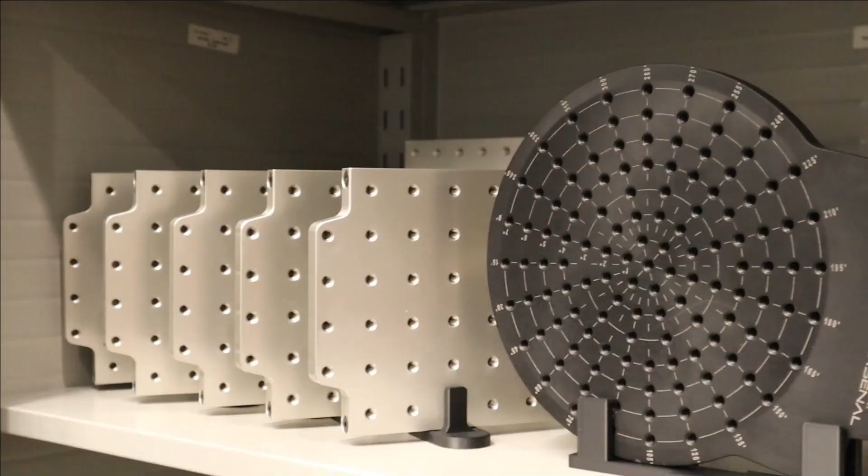One thing I do want to get right out in the open is that while the inspection clamps and fixtures don't really wear out, this is actually the most consumable fixturing system on the market for the inspection lab today. So many customers will be reordering and placing additional orders for ancillary products and additional accessories, more plates as their production grows. And as they're building fixtures for repeat jobs, those fixtures are going to sit on the shelf and they're going to need more fixturing for more jobs in the future.

So regardless of whether they are inspecting onesie-twosies or prototypes or long runs of production and repeat work, going with a modular design and getting parts on and off their machines faster is going to be the utmost value to them. Because profits are in the speed of the swap. We know that on the CNC machines on the shop floor - if you can get product in and out of that machine faster and eliminate that downtime, that's where you're going to start to see your bottom line grow.

No matter how fast you're making parts on the shop floor, if you've got a bottleneck in inspection, or things are getting jammed up in assembly or laser marking, there's really no point in making parts faster on the shop floor because your entire process is still slow due to other areas. So if we can help break the bottlenecks and open up that workflow, you're going to be delivering perfect parts that much faster.

Some of you may already be aware of how a CMM works or how a vision system works, some of you may be brand new to it. To make it as easy as possible to understand, a CMM machine uses a touch probe to touch off on the part and take locational dimensions in relation to datum points set in your program, whereas vision uses a camera and lens to locate those parts. A vision system is usually faster, however it's tricky to get three-dimensional imagery or features on any given part with just a camera, so that's where your CMM comes in.

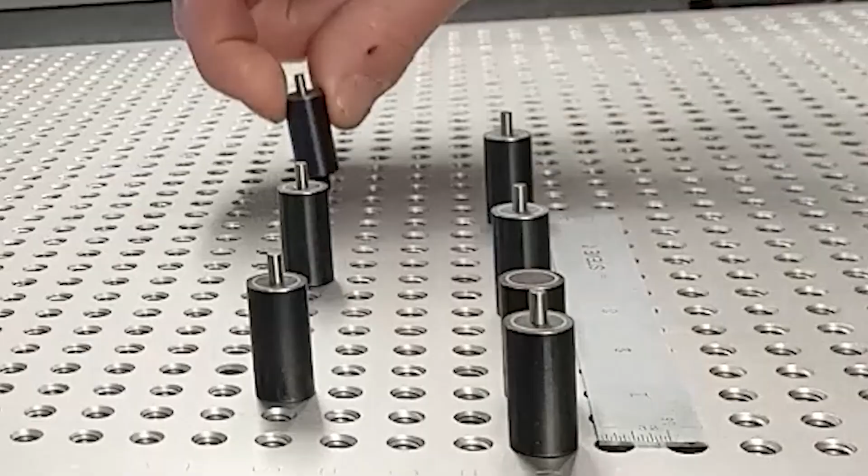So, I mean, you're talking some serious machines here. It's clear that these machines are quite valuable - the technology allows you to pick up multiple features on three-dimensional parts all in one go, very accurately, very efficiently, and the repeatability is staggering. But not without proper fixturing. So no matter what you do and how great the machine is, if you're spending countless hours trying to develop a fixture or build a fixture, tearing fixtures down and rebuilding them, that's all downtime that begins to diminish the value of the machine.

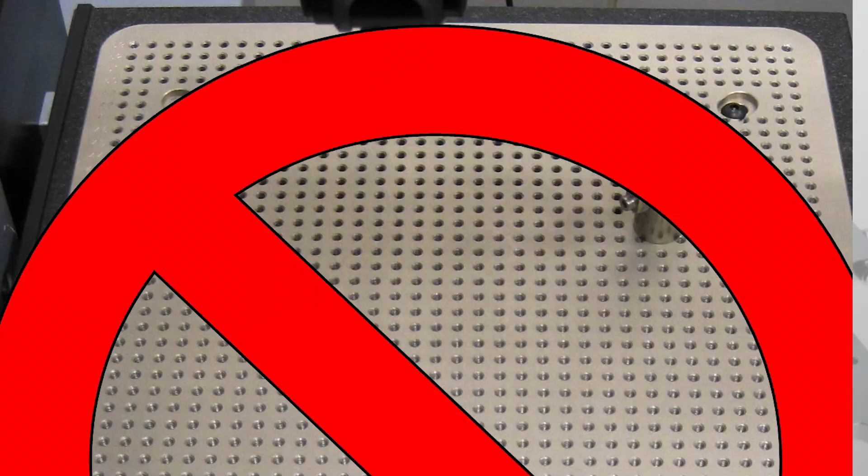So anywhere you can eliminate that downtime, you're going to increase the value of the machine and the value of that process. Again, profit is in the speed of the swap. We're here to deliver perfect parts faster. And your one-piece grid plates, they are yesterday's news - they are old school, they are outdated. Your inspectors are literally stuck working on one piece at a time.

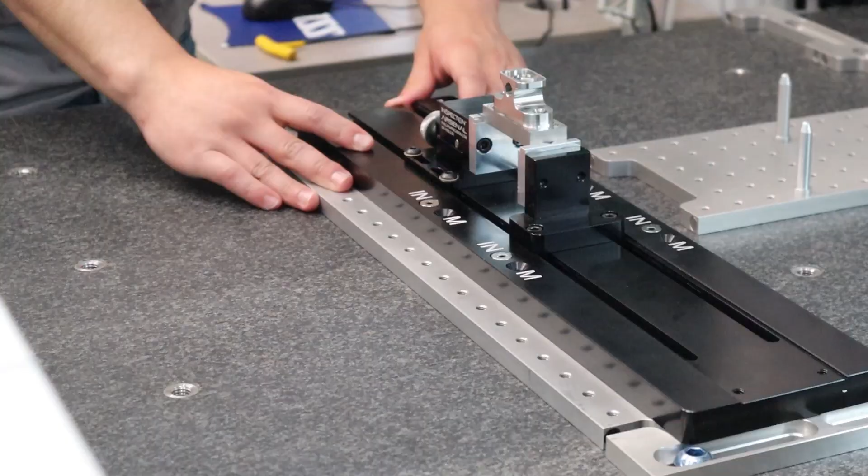And depending on how many hands you have in the inspection lab, every time that fixture is built, it can be built a little bit different. You may get different results from your inspection process every single time, and that's something we want to try to eliminate. So you can build your fixture one time, it stays built, it doesn't have to be changed or swapped over. It can stay built on a piece of fixture or a grid plate that can be loaded onto the machine many times, even faster than it takes to pull the program up in the computer system. And that's not an exaggeration.

So just remember the takeaways: for modular quick swap fixturing, you're increasing the bottom line by eliminating downtime - eliminating the time that the machine is not running, eliminating the downtime that the machines on the shop floor are not running.

You are gathering inspection data much faster, catching mistakes and errors much faster, so you're not running at risk, not making bad parts without knowing it, and you are really protecting your company's reputation on being able to make good parts and deliver them on time.

Speed up the ROI on all of your machines by increasing the amount of uptime that they are, the amount of time that they're actually running.

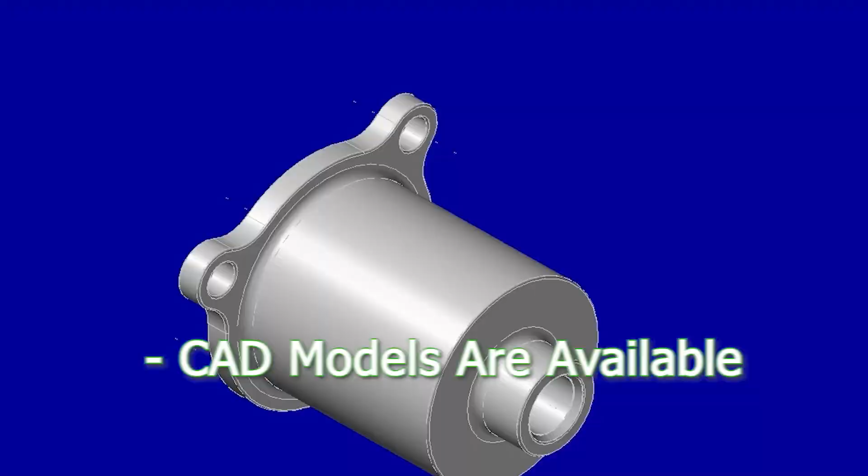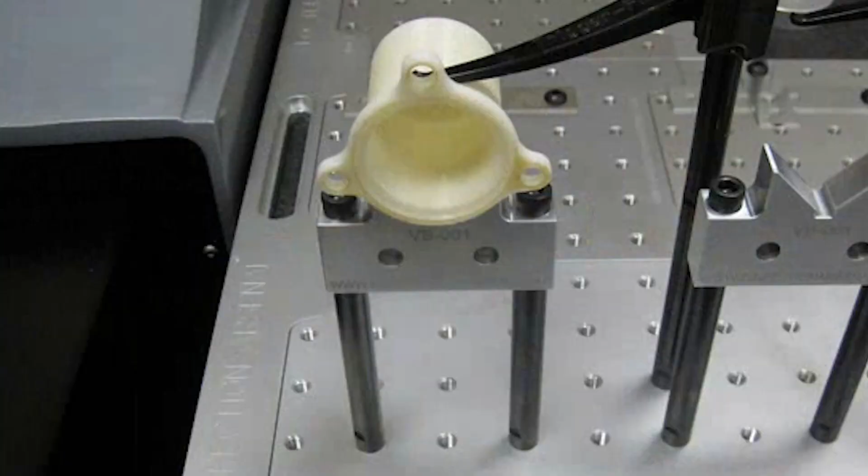You can increase employee morale by taking stress off of them, by giving them an opportunity to build fixtures much faster. We have CAD models available for all of our products, so at the same time that you're developing the fixture for the shop floor and developing the part, you could be developing an inspection fixture. So when that part comes off the shop floor into the lab, it's not an afterthought. You already have a concept or a design ready, and in many cases you could even have a full fixture already pre-built and waiting for that part.

So you get that part, and if you're in the middle of a long run, you can remove the fixture you're working on, pause that program, load up your next one, and give that data back to the shop floor, then go ahead and pick up where you left off on the first project you were working on.

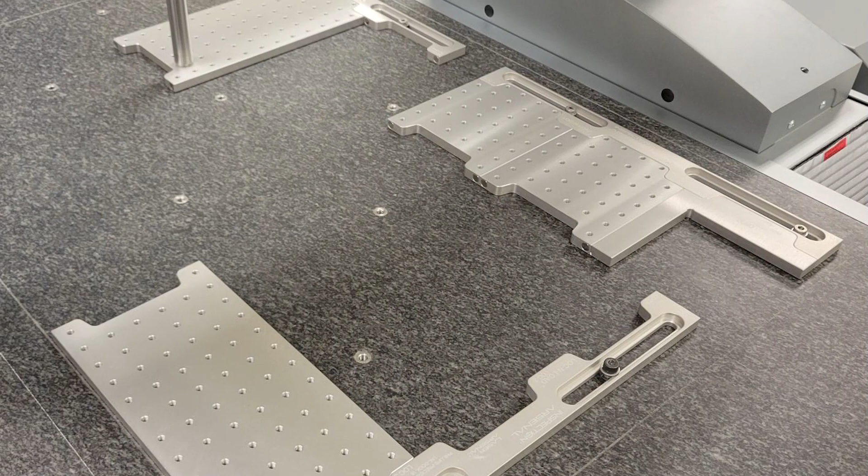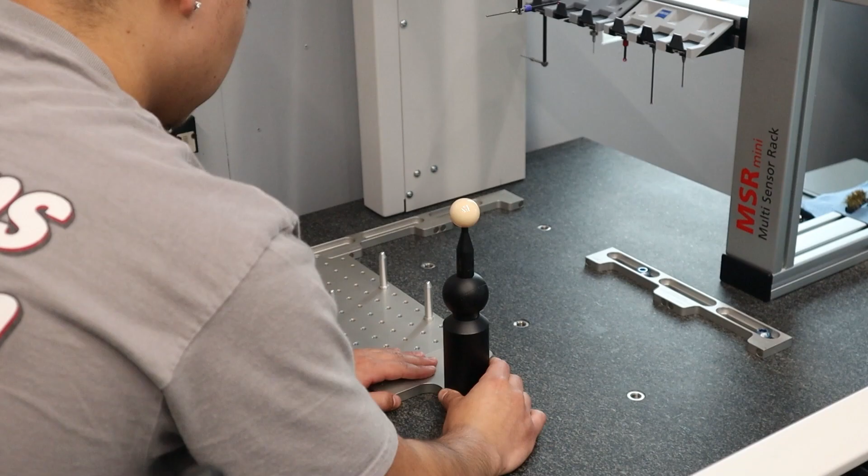Something to keep in mind: there's really no right or wrong way to set up your machine. It's like an erector set, so you're limited really by your own creativity. We keep a rail on the X and Y axis of the machine, and we use double-sided tape, so you can actually stick it right outside the work envelope, and we don't lose any of the measurement area of the machine.

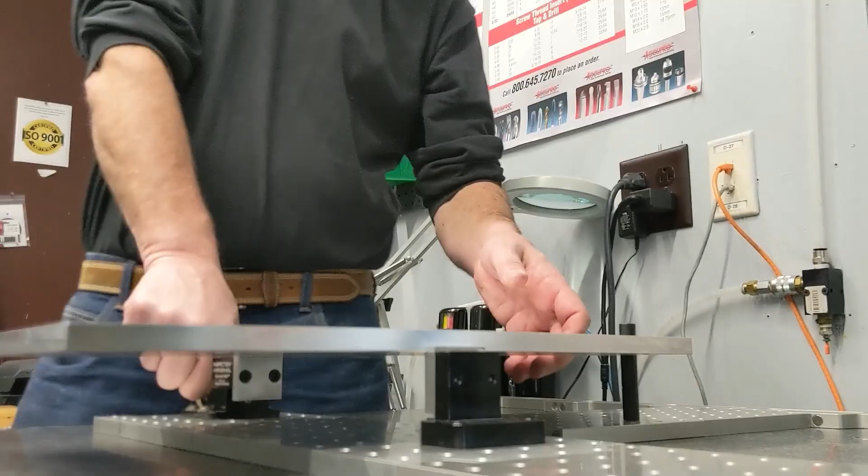This gives us an immense amount of flexibility to set up jobs the most efficient way possible. We also have customers who run a series of rails across the entire granite, where they can load up their fixtures wherever they need them to go. In many cases, you could load up multiple parts on the machine and run a whole string of parts in a routine, which helps automate those processes too.

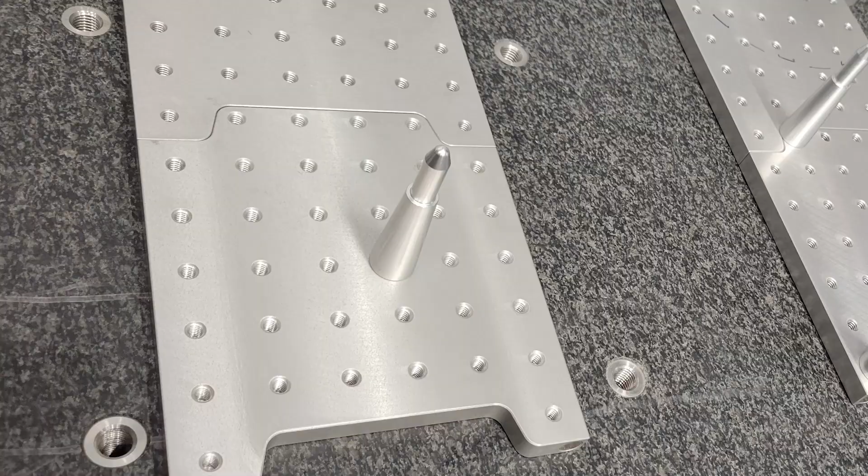You could set up parts and run them out lights out. From there, you'll just need to help your customers decide what plates they need to accommodate the workpiece, not the machine. There's never any reason to cover the entire granite surface. You could easily put a fixture on one plate over here, and on the opposite end of the machine put another fixture, spanning your part right across the entire machine, with all bare granite right in the middle.

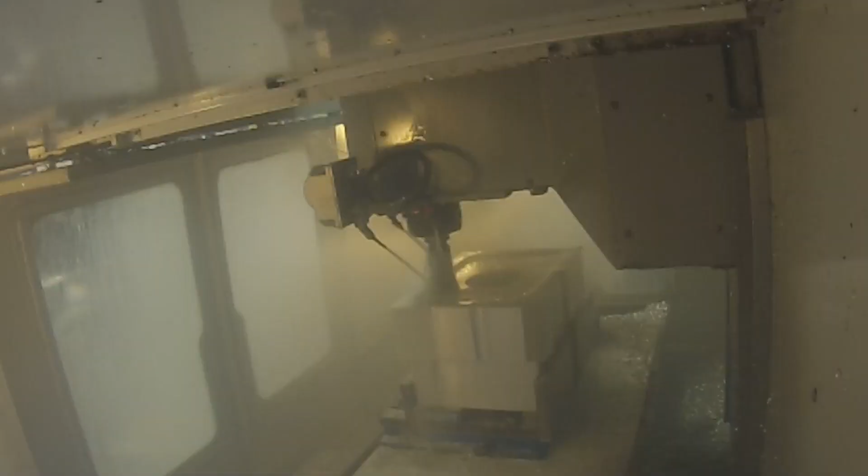So in the beginning, we started off doing rapid prototyping, a lot of 3D machining. I had the shop set up, so it was just a one-man show. I had the shop set up with cameras on the computer, and I'd get the machines running, and I'd get to the point where I could go home, have supper, spend a little time with the kids, and keep an eye on the machines.

One of the problems we had was parts would rip out of the machine. If you're pushing parts a little too hard, the parts would pop out of the vise or your fixture, and we kept having to slow our feeds and speeds down to compensate for the clamps that were available at the time. So after about an hour worth of design, and another hour or so to come up with a working prototype, we had our very first Pit Bull clamp.

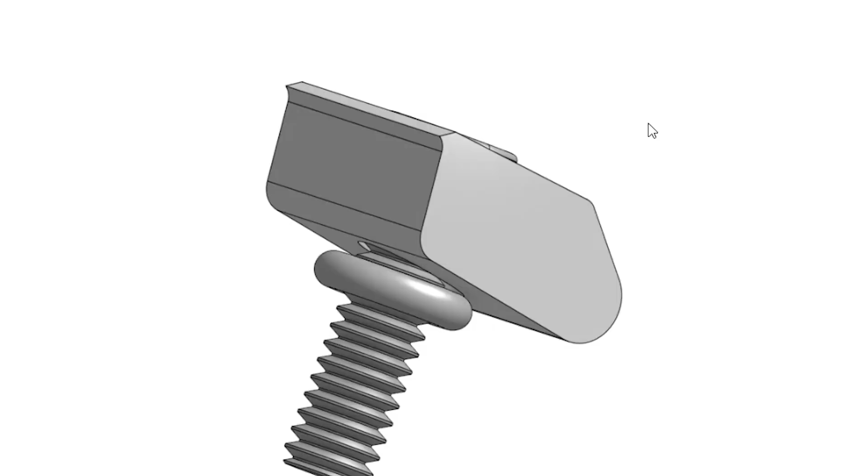My brother and I actually kind of played around with the clamp, and funny story there, I kept telling him, go a little faster, and my brother was like, I don't know, I don't want it to blow up in my face. I'm like, push it.

And so he pushed it as fast as he possibly could to try to get it to come out, because he was mad at me for barking at him, and it stayed right there. At that point, we realized we had a winner.

So what cost me about an hour of my time, maybe a few hours to tweak things, it cost my wife Kathy a number of years getting the patent written and getting that all going. That was probably the harder part.

But that was kind of the early years, and eventually we ended up selling that off to Mitee-Bite.

And in the meantime, we got our first CMM, and it's got just a plain granite plate with some bolt holes in it. One of the very first questions I asked the tech was, how do people hold parts for production? How do you load this machine up?

You can't use hot glue and sticky tape, double-sided tape for everything. What do you do? He said, well, they have plates out there. They're really expensive for what they are. Most people make their own once they get a load of the price.

You'd take your fixture components and screw them into certain locations, and then when you're done, you'd have to break it all down. You'd have to put all your components away, and then the job would come back a month later, and now you have to set it all back up again.

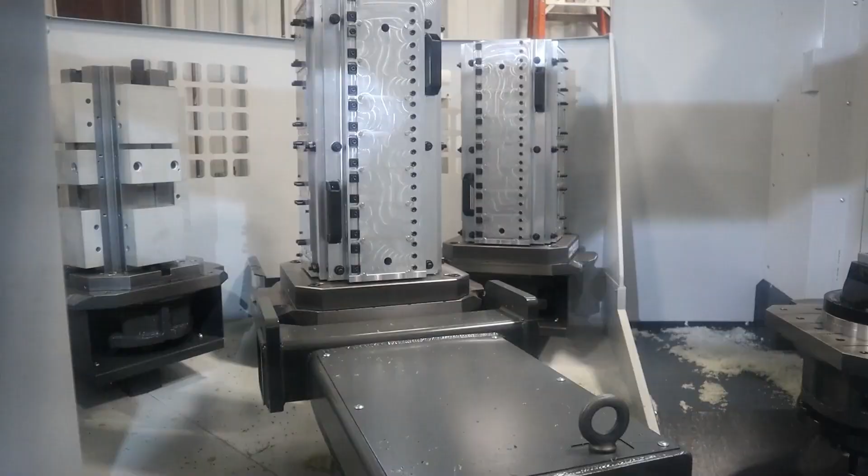And I'm a machinist. I'm out in the shop floor, programming jobs, making fixtures, and in the machine shop, we make fixtures. When we're done, we put them away. Next time the job comes back, you take the part, you put it back in the fixture.

And you're running parts very quickly and efficiently. So my thought was, well, why would we treat our CMM differently than we would our milling machine?

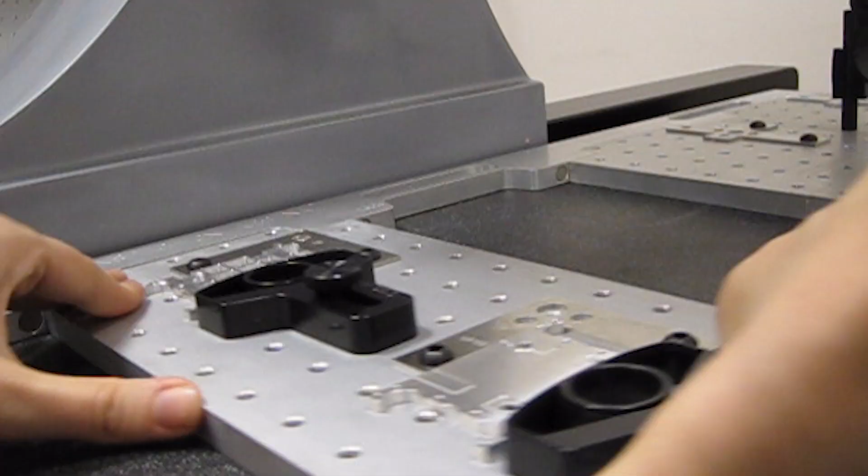So now that we have this new product, the inspection arsenal, we have this nice rail and plate system, the inspector was able to switch over jobs faster. I noticed the line of machinists going into the inspection department got shorter.

A lot of those jobs that we had, we just left them on a fixture plate dedicated for that particular part. Those fixtures were on the shelf, ready and waiting.

So rather than having the inspector playing battleship, building a fixture up and then tearing it down and putting everything away, you take the fixture, plug it into the rail, and get those parts inspected right away, get the feedback back out onto the shop floor.

Machines are running more often. They're not sitting there idle waiting for the first article inspection.

It literally went from what could have been a half hour to an hour, even several hours, to just a few minutes, which was incredible.

And so we saw the value in it. Our customers saw the value in it, and it just took off.

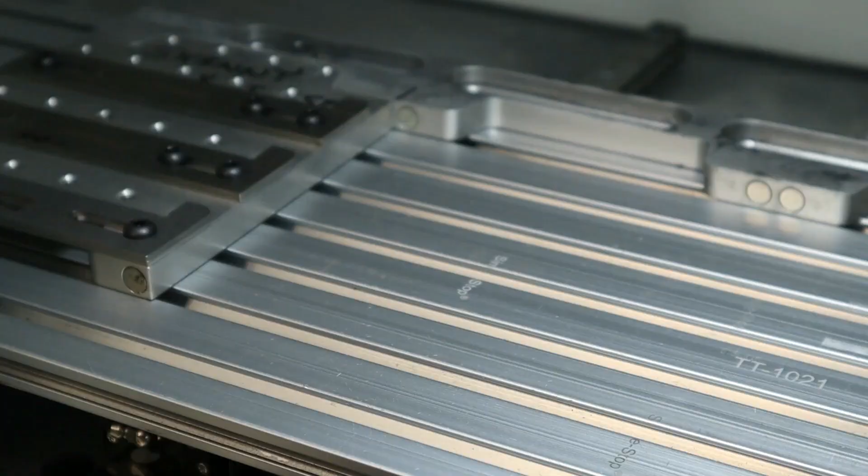And then it wasn't that much longer after that where we had our laser marking system. We started using it ourselves because it just seemed like a natural fit for the product.

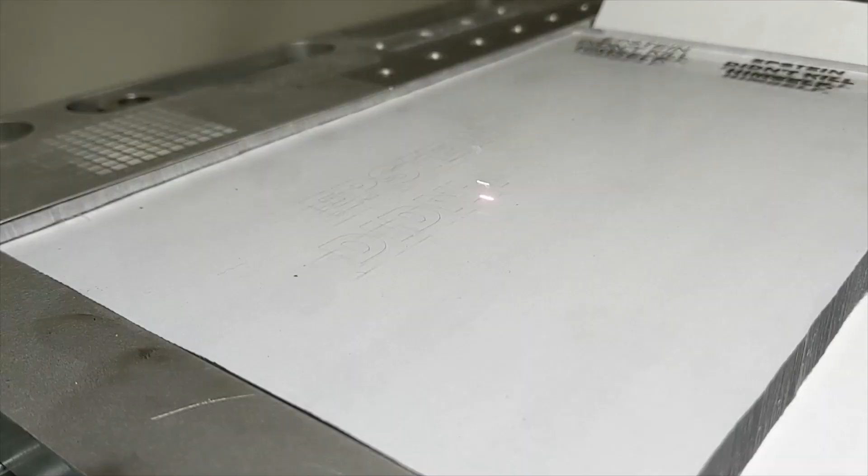And that was a home run. We had a bunch of customers that implemented it in their own shops for getting laser work turned over quickly and efficiently. It's such an easy sale.

You go in, and the first thing you ask—you go into almost any shop, and you'll ask them, where's your biggest bottleneck? And they're going to say, oh, it's the inspection. The inspector, it takes them too long, this and that, the other thing.

And you take a look at the CMM, and if it's just a plain granite plate, it's a no-brainer. You get that rail on the plate, and you get your qual sphere on and off the machine, park that out of the way.

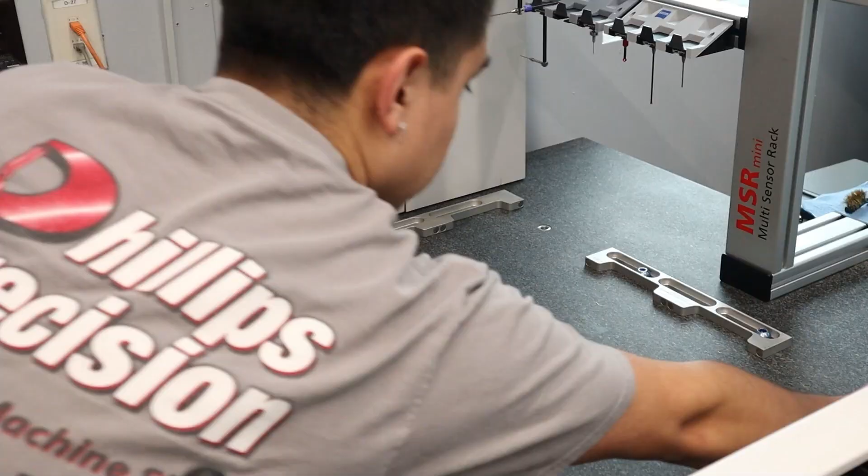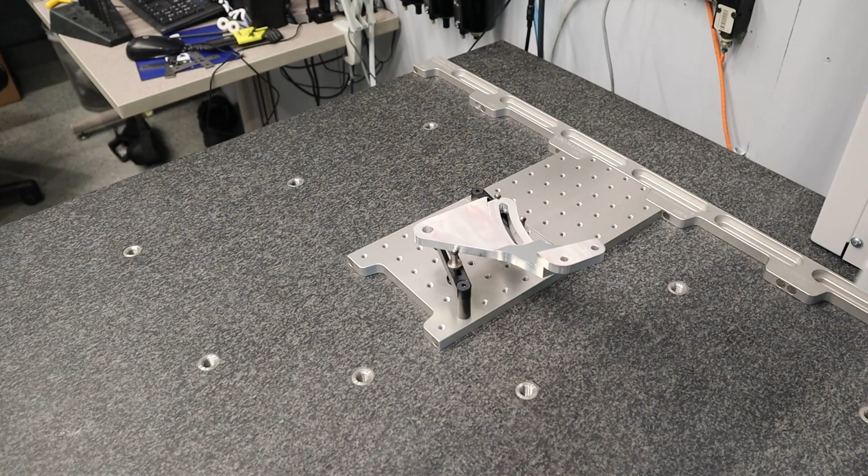Get just a few different fixtures on and off the machine within just a few minutes, and you'll see a huge improvement in production—it's just an easy sell.

Whatever we have on the shelf, we can pull it off and ship today. If it's in our catalog, more than likely we have it in stock. So anytime we can use standard product, we will.

But there are times where you maybe have to modify product. That doesn't take very long—might be a day or two, maybe a week, depending on how sophisticated it needs to be.

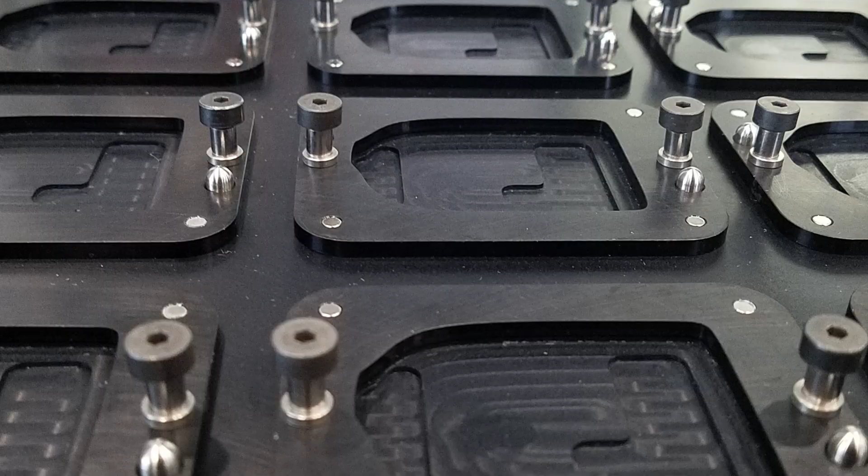But there's a lot of times they're going to require a custom fixture. There's almost no getting around some of them—they just have to have clocking features and little tiny details.

One of our specialties is designing custom fixtures for products like that. And Victor Rinaldi is our engineer, and he can definitely get into a lot more detail in that regard.

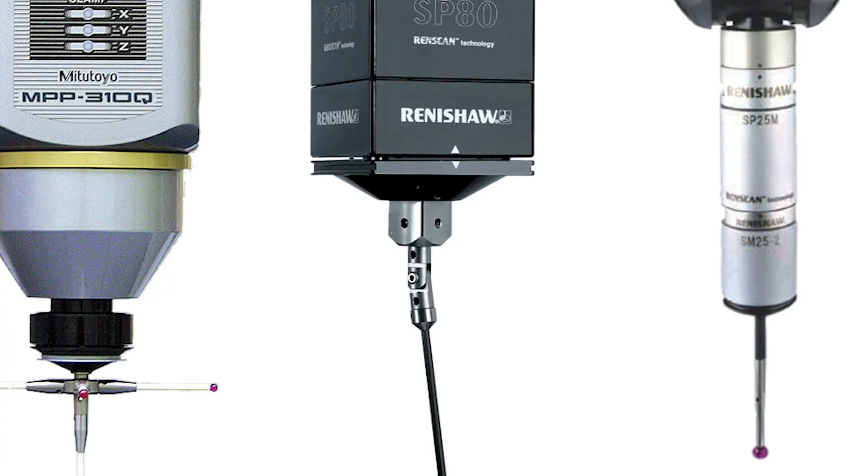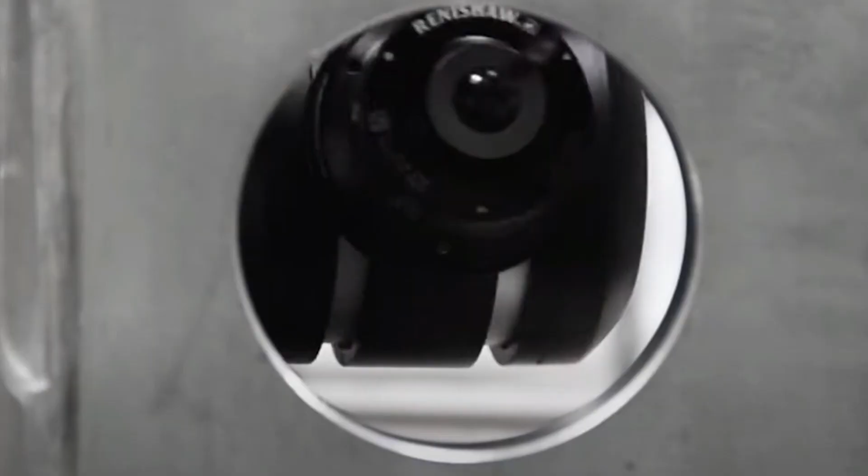On the other hand, on the CMM, we need to understand if the CMM head is a fixed head, a static head with several different probes - straight down, star, L, or whatever else - or if there is just a straight probe down and the head is an articulating head, giving the customer the capability of rotating that head and getting around the part as they please.

When I create a fixture for vision, it is designed on top of a polycarbonate plate, with a post or a device holding that part in place. Once the part is in place and you take a view from the top, you should not be able to see that post or device, and the silhouette of the part should be completely free. In fact, in many cases, the plate itself is relieved to make sure the silhouette of the part is not on top of the plastic, in order to provide the most amount of light without any scattering.

Many times a part can just be put on top of the post or device with no retainer, because the approach the customer is taking is purely vision. However, if the customer is using vision and tactile, now we need to create a sort of retainer to ensure that part does not move when the probe is touching the part.

The most important part when I design and create a fixture is to ensure that I use surfaces that are available to me that are not going to be inspected. However, if I must use datums, I hold the part in several points - usually 3, but depending on the geometry of the part, they can be more than 3 - and then use either a spring-loaded device or a magnetized device to create enough downforce on the part so that it does not move.

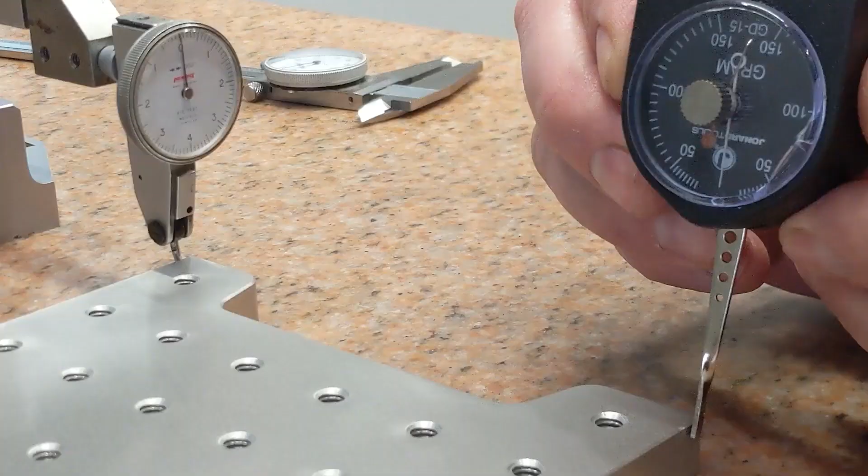Generally, a probe from a CMM or a vision system will exert about 5 to 8 grams of force, which would be about 0.08 newtons, give or take, on the part. One of our goals is to make sure that when we retain the part, if it's robust, we measure it with a force gauge, and we want to make sure we don't dislodge that part from the fixture with at least 50 to 100 grams - basically 1/2 to 1 newton of force.

And this applies for both CMM and vision systems, and it's also based on the size of the part. If we have a tiny part, obviously the force is going to be much smaller. If we have a part that is 20 by 20, plastic, and bowed, and needs to be constrained, then that is a different approach.

With that said, let's talk a little bit about the design of the post. Basically, when we start designing for a fixture, we don't just jump into the CAD and start designing something. Usually the design reveals itself. You create some sketches on paper, then you start poking holes in that theory, and you start understanding and visualizing if you can get around the part and check everything else.

Then you create an assembly on the CAD, and with the part on site, you begin generating the fixture around the part. That is the same process regardless if it is vision or CMM. The only difference is depending on the size of the part. If we have very large parts, the forces applied to maintain that part in location are greater than if we have a very small part.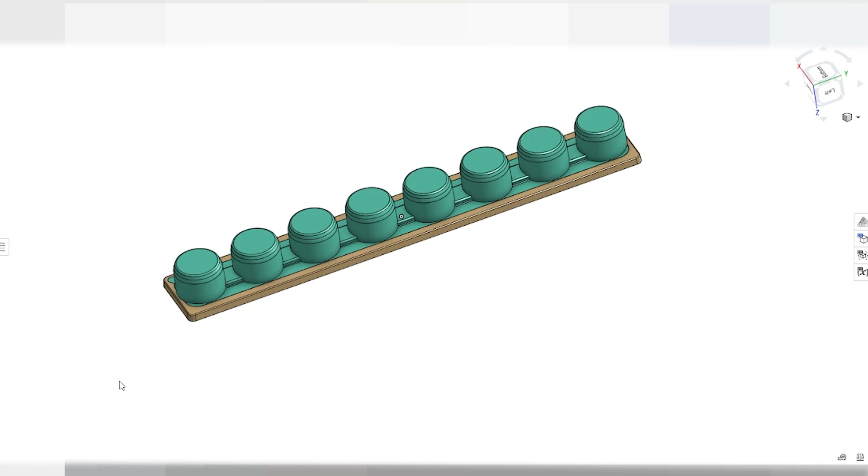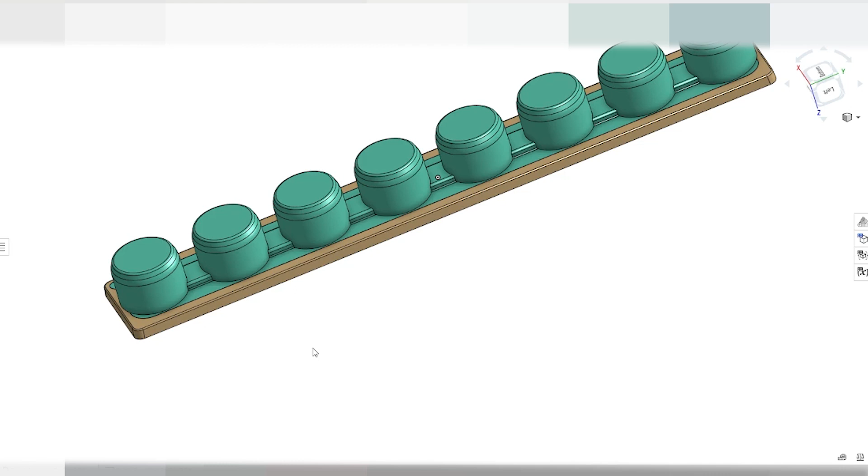This part is flexible, made of two types of plastic. The brown one is not as flexible, but it's still bowy, and the green part is a very soft silicone type plastic. Therefore, this part is not flat, but it needs to be constrained in order to measure the diameters of the hubs at several heights, and also the distance from center to center, which is a basic dimension.

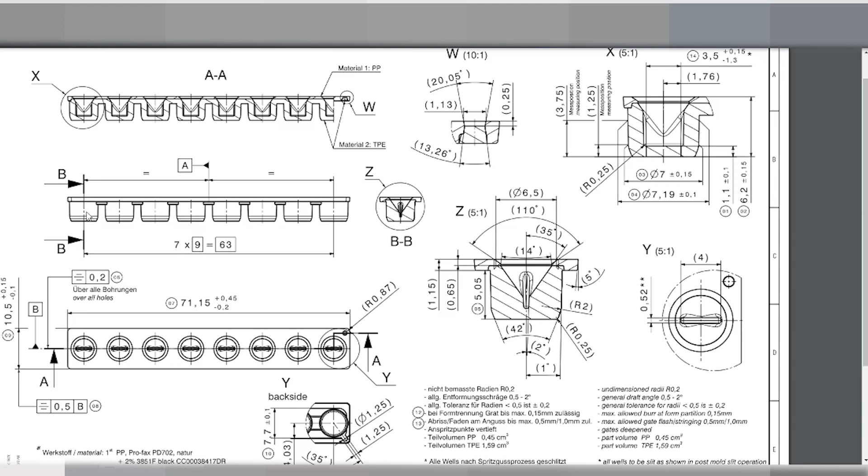This is a quick view of the print. As you can see on the top right, we have different heights and diameters that need to be checked, and over here we have 7 times 9 millimeter. So from center to center, for the last one to the first one, it's 63 millimeters.

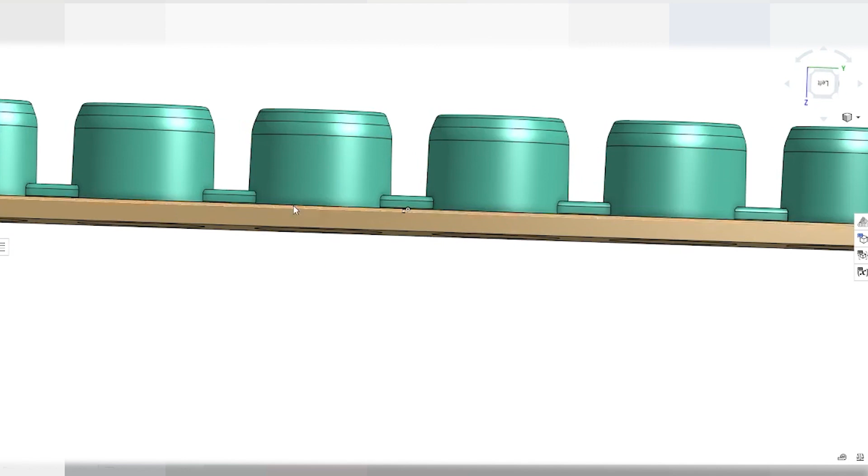In this case, this is going to be vision, and we'll be able to check from the top, checking the basic dimension going across from hub to hub. From the side, we're going to use a mirror, and we can pick up the center line and check those dimensions as well.

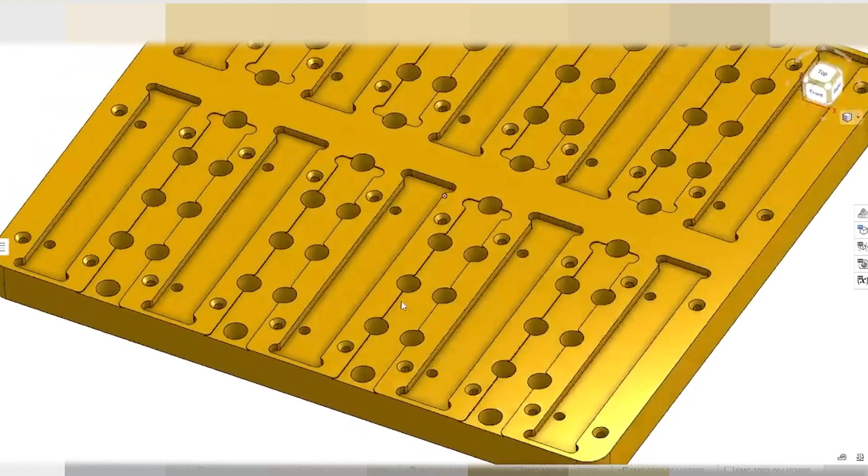So let's get moving here. As far as the parts are concerned, I designed a small plate, as you can see. It looks a lot like Swiss cheese, but it's needed to hold this part. The deeper pocket will hold basically a mirror post, and this small pocket will hold the part.

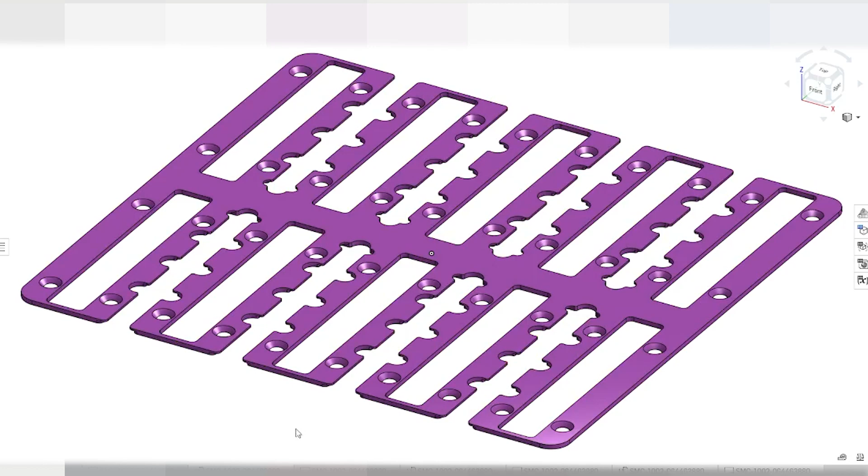The next part is basically a clamp that is going to be screwed on top of the main plate, with some slots in the bottom that allow us to move the part in and clock it or stop it at the bottom of the slot.

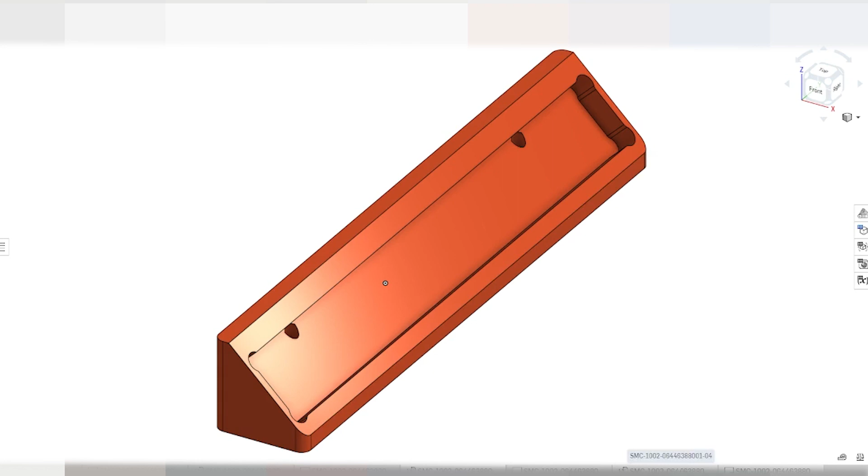After that, we have a mirror post, and after that, an end post. This is needed in order for the camera to see from the last mirror and not have any distortion or focus outside the range of the camera.

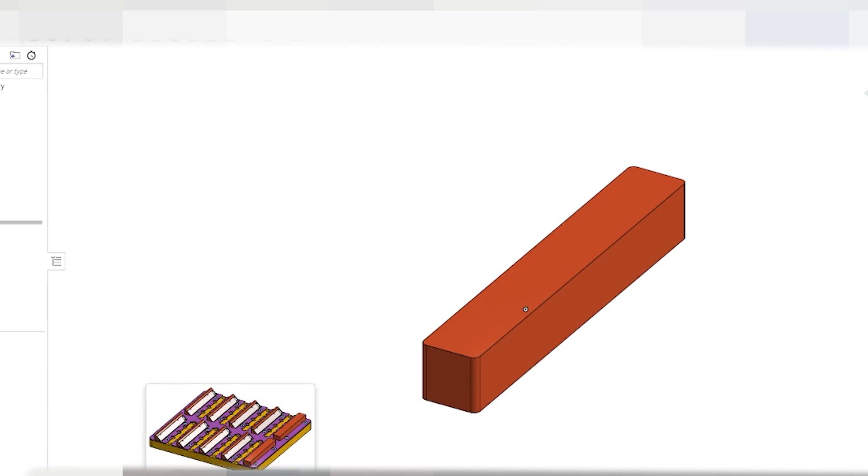So let's go to the actual assembly here. Let me bring this up. This is the actual assembly without parts. We have the bottom plate, then the top plate, which I call the retainer, and then the mirror blocks with the mirrors within that pocket.

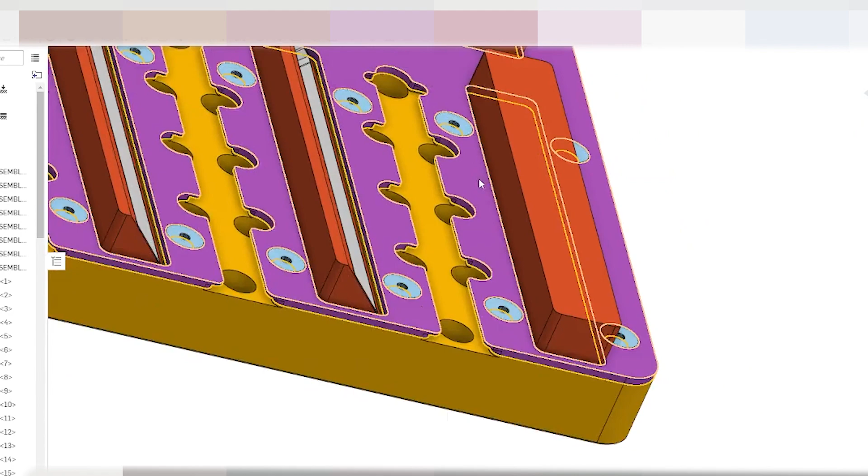And we have at the end a block that will allow the camera to focus through the mirror but not go beyond this surface. Next to it, the back part of the mirror is, in a sense, the backstop for the camera when it focuses on the mirror.

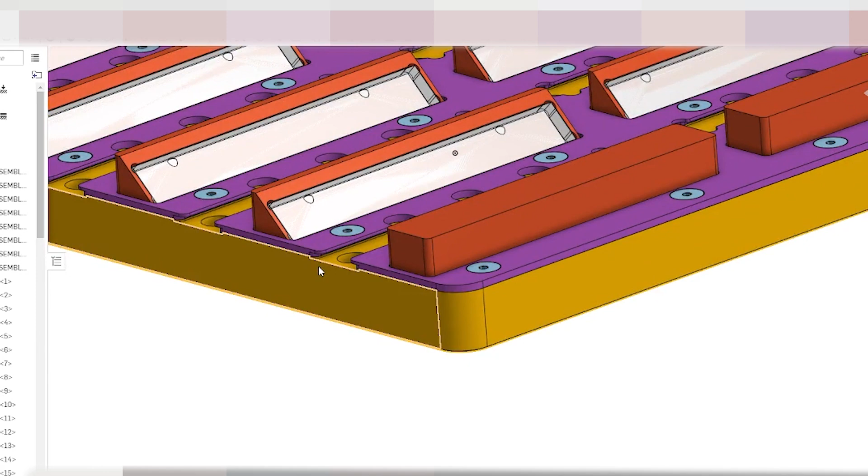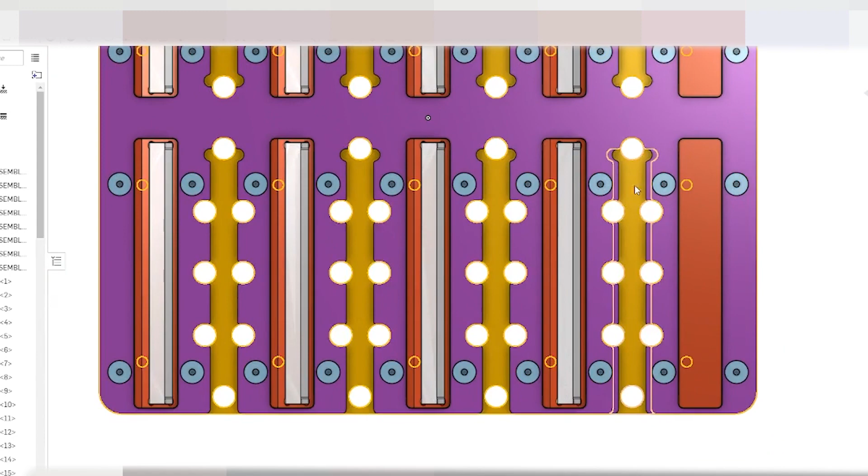Now, this fixture will allow us to basically insert or slide the part into the slot. It will stop at the end on these two surfaces, which is the same surface, therefore straightening the part and allowing us to see it from the top, get the total length, get the width, and get the basic dimension from hub to hub, and also look through the mirror and see the diameter at various heights.

Let's go take a look at the assembled fixture. And this is the assembled fixture. As you can see, the part is inserted into the slot. I'm going to quickly hide the clamp.

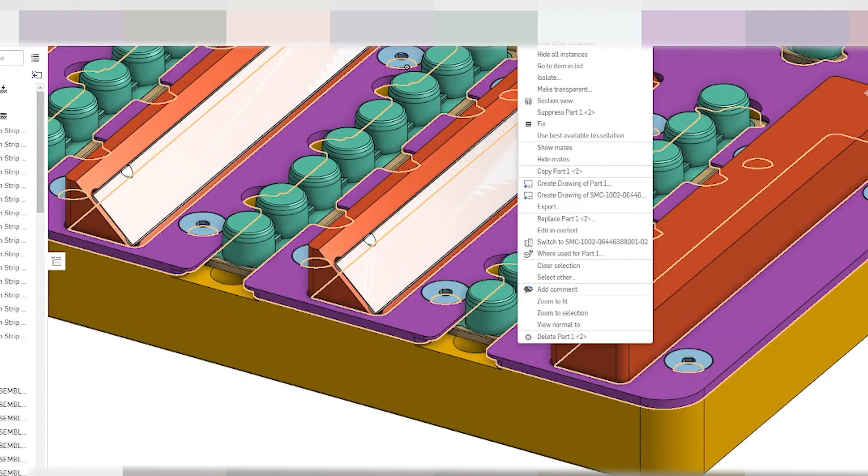As you can see, the part slides into the slot, stops at the end, and the clamp on top is static, it's not removable. So basically the part is slid into the slot all the way to the end.

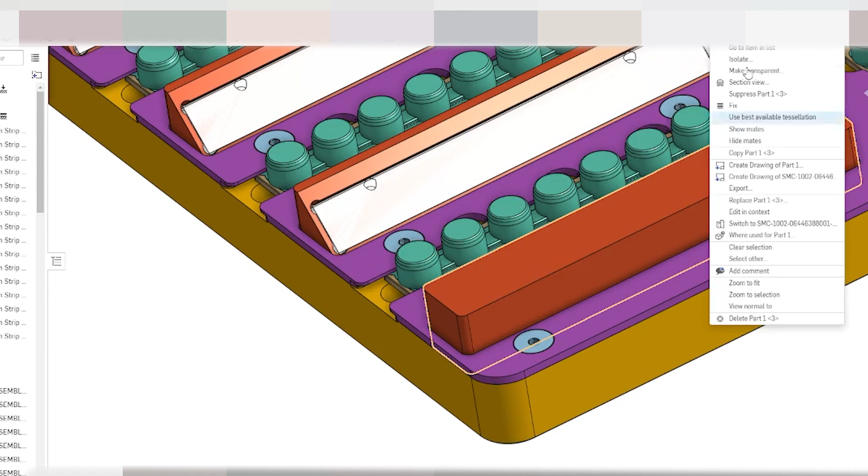Now I am going to hide this last block for a moment, so you get an idea that when the camera focuses on that mirror, it will be able to pick up all the diameters needed at different heights as per the requirement of the print.

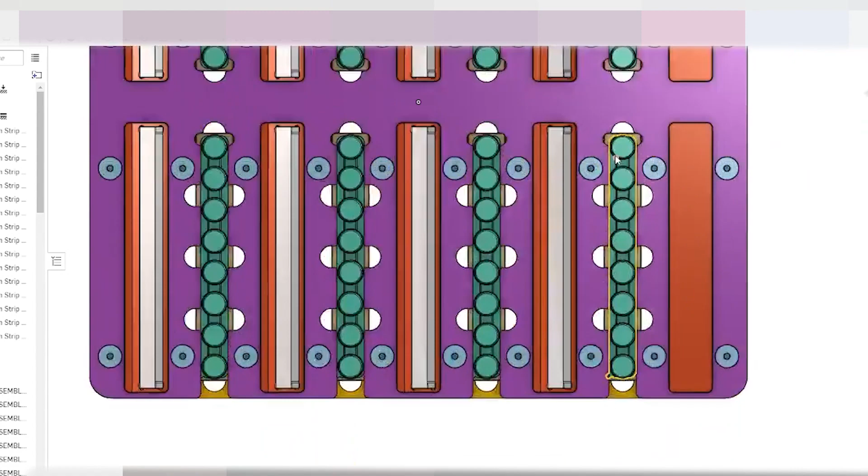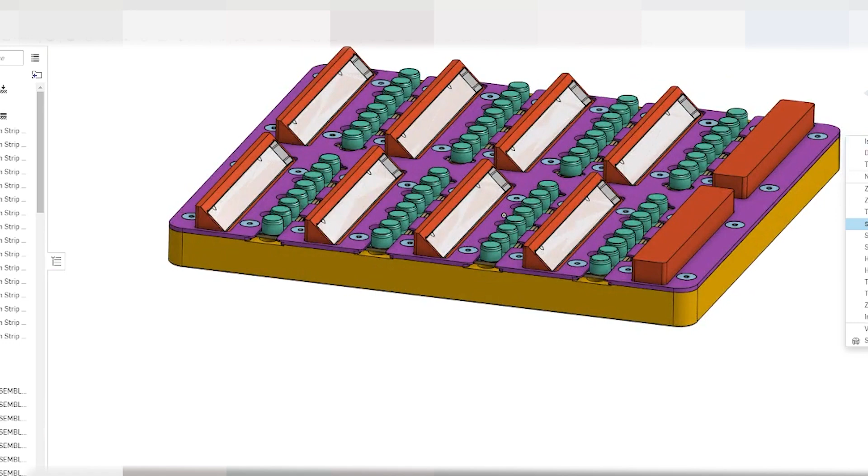Let me bring that back for a second. When the camera focuses from the top, it can get the width in 3 different places and the length of the part in 2 different places, and also the dimension, which is 9 millimeter from center to center of each hub for a total of 63 millimeter. That is a very basic approach of taking a print and the requirement from the customer. In this case, the part needs to be constrained and stopped, and we use a mirror to get dimensions from the side and the camera to get dimensions from the top.

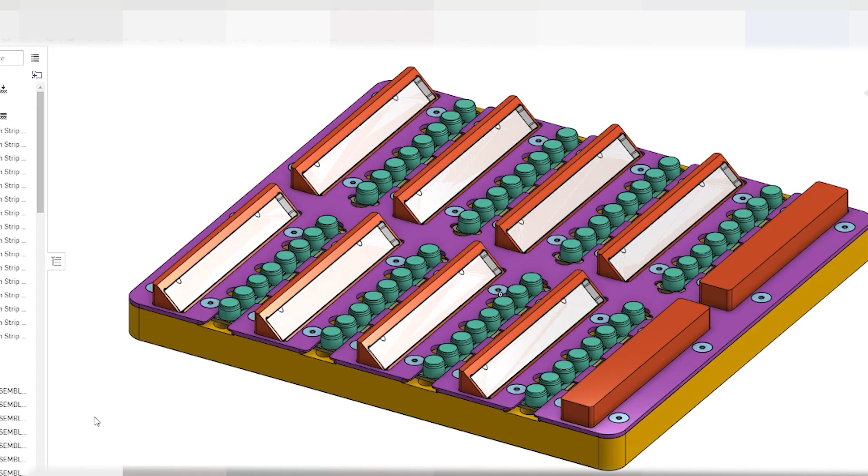I also want to discuss the process. How do we get there? For instance, if a customer or representative brings a part and says, I need a quote for this part, generally we get a model and a print. We have a quick meeting to establish the base requirements, and then we put our experience together and come up with a number that we call a budgetary number.

The budgetary number can be looked at as, in a sense, an NTE, a not-to-exceed cost. But generally that is a cost that has a plus or minus 20% chance of moving. That helps our customer create a target and say, this is your budgetary number. If you are within this budget for creating fixtures and parts, then we can move forward to the next step, and that would be to create a formal proposal.

When we create a formal proposal, in a sense we are still flying blind because we don't have any models yet. We just have basic requirements, a model of the part, and prints of the parts with the dimensions that we have to inspect. At that point, we compare and contrast with other older fixtures that were designed, and we try our best to create a formal quote based on that.